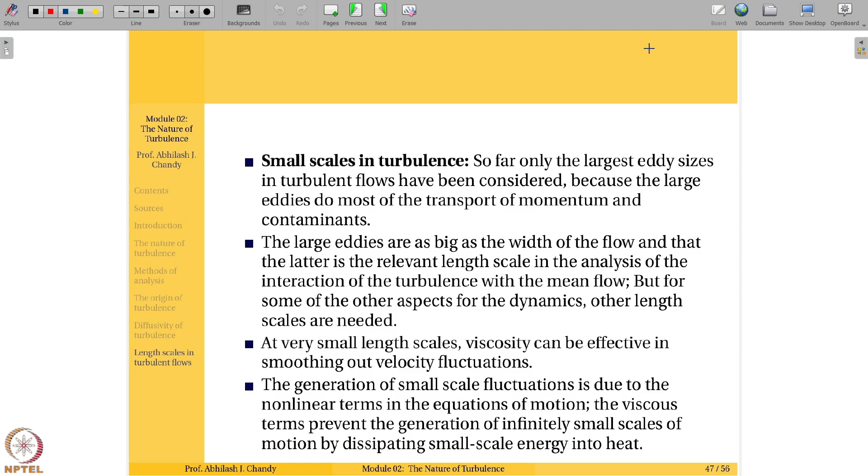And that makes sense, right? Viscous effects are more dominant at the small length scales. It is true at the large length scales the viscous effects won't be as dominant, and they can indeed be neglected because they are negligible. But on the other hand, you cannot do away with viscosity, and that's actually what we are going to continue here, especially since we are going to talk about the small scales of turbulence. Viscosity has a role to play. Dissipation at the small scales happens because of viscosity. That's the main topic for today's class.

So far we've been talking a lot about large length scales, isn't it? Because they are indeed the most important. They are what supplies the energy to the turbulent flow. That is where the energy is pumped in. So they are responsible for transport of momentum, transport of impurities, contaminants, any kind of species. They are mostly responsible for that. However, there is another effect that is also in play, and that is the viscous effects.

Now, if you think about the large eddies, large scales, they are as big as the width of the flow. So if you talk about a pipe flow, they are as big as the diameter of the pipe, order of magnitude. If you talk about flow over a cylinder, they are as big as the diameter of the cylinder. Flow between two plates, as big as the distance between the two plates. Boundary layer, that large length scale would be of the same order as the boundary layer thickness.

However, at very small length scales, viscosity starts to play a role, right? And the smallest length scale is the length scale at which viscosity is active, the length scale at which dissipation is active. And here, viscosity plays a huge role. So keep in mind, the smallest length scale doesn't mean micro scale where continuum is not valid. Continuum is still valid. We are not going down to the point where molecular scale becomes important. Molecular diffusion is important. That happens because of viscosity.

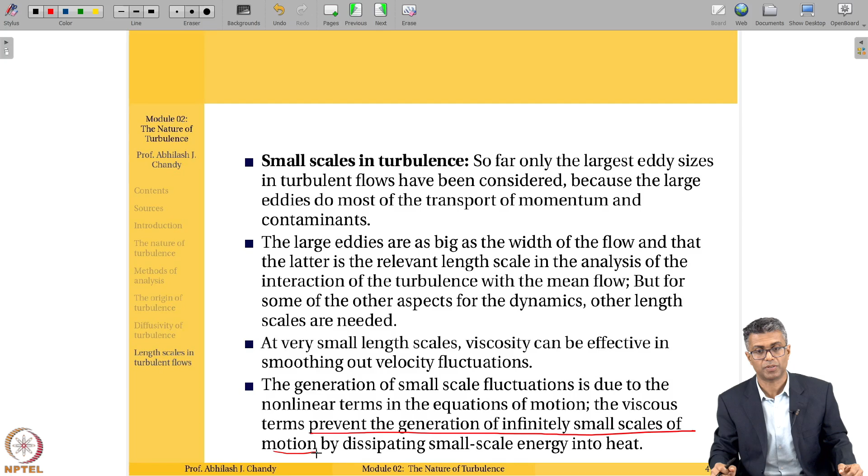So this happens, obviously, like I was saying earlier, because of viscosity. This happens because of kinematic viscosity. What happens here is, at large Reynolds numbers, it is expected that the magnitude of nu, kinematic viscosity, is so small that the viscous effects tend to be really small, negligible. But there's another effect that happens here.

The nonlinear terms in the Navier-Stokes equations counteract this threat by generating motions that are small enough to be affected by viscosity. So we would think, okay, at the large scales, at high Reynolds numbers, viscous effects can be negligible, right? So can they be neglected? No. So immediately what happens is the nonlinear terms generate small scales that are small enough for viscosity to play a role.

So in a way, you cannot just do away with viscosity, because viscosity has a role to play in dissipation. And dissipation is one of the main attributes of turbulence, as discussed earlier. That role is played by viscosity alone. So you would think, okay, at high Reynolds numbers, inertia over viscous effects can be neglected because they are negligible. Not so fast. What happens here is the nonlinear term is active always.

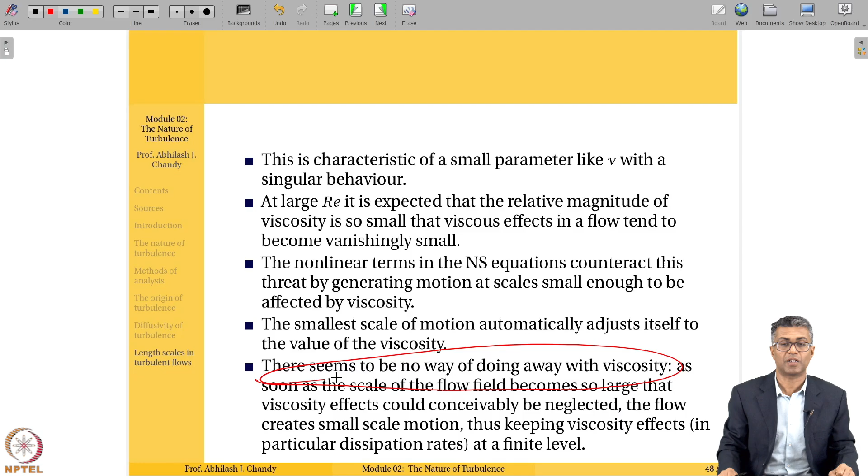As soon as the scale of the flow field becomes so large that viscosity effects could be neglected, right? The flow creates small scale motion, thus keeping viscosity effects at a finite level. And this is in terms of dissipation. It is in terms of dissipation rates. So that is where viscosity comes into play.

So if you have a flow that has only a lot of large scales, then viscosity might not play a role there. It might not play a dominant role there. It might not play a finite role there. So then what happens is the large scales are immediately broken down into small scales. Then viscosity has a role to play. And this keeps happening. That's the role of viscosity.

Now, we know that large length scales are associated with large time scales. They take longer time to move from one point to another because these are large scale motions. On the other hand, small length scales are associated with small time scales. Because they are small in size, they take shorter time to move from one point to the other. So small scale motions tend to have small time scales, and this is really important. This is the basis of one of the most important universal theories of turbulence.

If the small length scales have small time scales, meaning what? What does small time scale mean? Meaning they tend to move very fast, that's one thing, and also they tend to exist for a very short period of time. That time scale determines the amount of time that they actually exist. They have a small time scale.

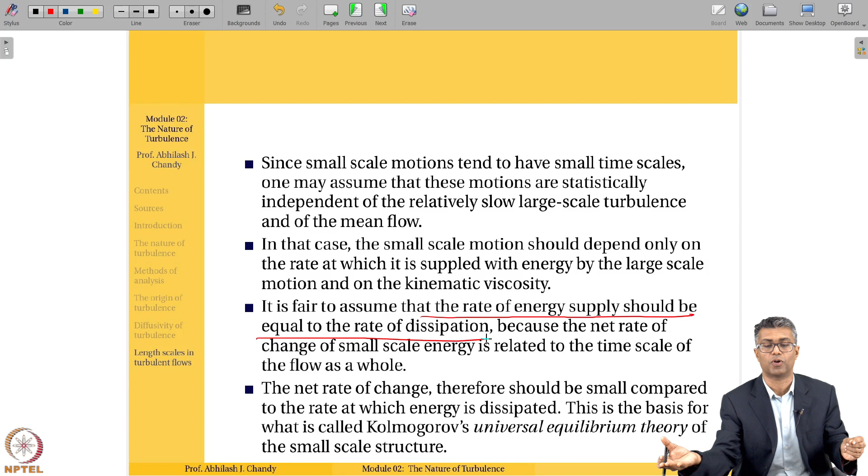So in that sense, the rate at which energy is supplied, the energy is supplied from the large scales to the small scales, should be equal to the rate at which energy is dissipated, because they don't stay for a while. And that's what I mean by, because the net rate of change of small scale energy is related to the time scale of the flow as a whole. So this net rate of change should be small compared to the rate at which energy is dissipated. This is the basis for Kolmogorov's universal equilibrium theory for small scale structure.

What you have is the small length scales have very small time scales. So they only stick around for a very short period of time. They immediately dissipate to heat through viscosity. If that is the case, then one can assume that the rate of energy transfer from the large scales to the small scales is the same as the rate of dissipation, because everything happens almost instantaneously. That's our argument, and that is the basis for Kolmogorov's theory.

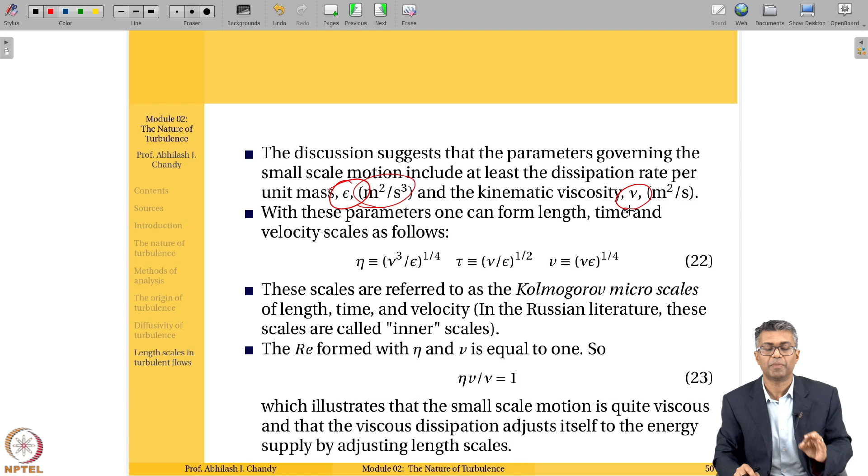Using these two parameters alone, you can come up with a set of length, time, and velocity scales at the small length scales. So you have eta, which is a small length scale, the smallest length scale possible, in fact, identified in turbulent flow, a time scale, the smallest time scale, and the smallest velocity scale.

These equations are determined purely based on dimensions. So if you think about it, just as a simple exercise, nu has units of meter squared per second and epsilon has units of meter squared per second cube. So if I take nu cube over epsilon to the 1/4, what I get is meter to the 6 divided by second cube, isn't it? Divided by meter squared per second cube. This whole thing to the 1/4.

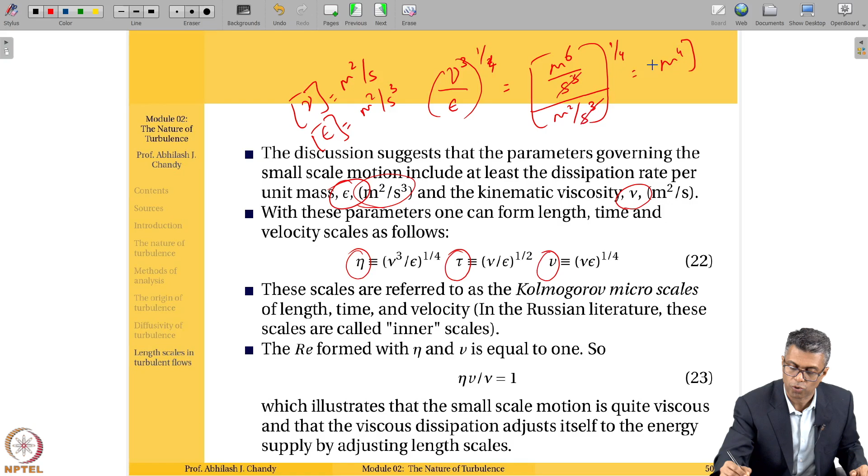And then the second cube and second cube get cancelled. And what I have is meter to the 4th to the 1/4, which is meter, which is what this is. This has units of meter. It is a length scale. It is a small length scale.

These scales are referred to as the Kolmogorov microscales, which in his paper in the 1940s, he called the inner scales at that time. The paper was originally written in Russian, translated later. So the Russian translation came out to be called inner scale. So that is what he called it in his paper, at least based on the translation at the time. So we now call it the Kolmogorov length scale, the Kolmogorov time scale, and the Kolmogorov velocity scale.

The Kolmogorov length scale is probably one of the most important developments in turbulence. Mainly because even to this date, this is used as a criteria for determining whether your experiment or model is well resolved, can be accurate enough or not. Purely based on this definition. The Kolmogorov length scale is defined as nu cube over epsilon to the 1/4.

If you have a way to calculate the dissipation rate, which is not easy to do in a turbulent flow, then you can estimate the Kolmogorov length scale like this. Obviously, there are different ways to do this, and we'll discuss those as well in the next few classes. But if you have a way to calculate the dissipation rate, this is one way to calculate the Kolmogorov length scale. Now, viscosity is of course known because it is a property of the fluid. So, like I said, this is the Kolmogorov length scale. This is the Kolmogorov time scale.

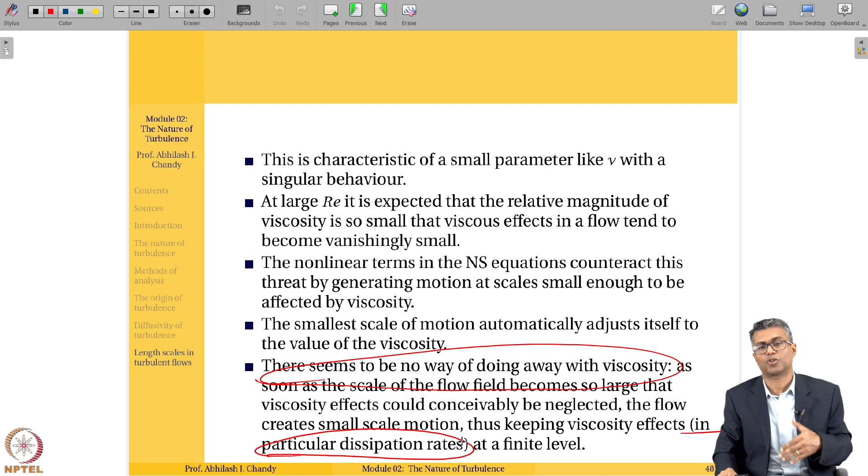It's very interesting, right? So if you think about these length scales, this is going to be provided as an exercise for you. We are going to use Buckingham Pi theorem to come up with these equations. It is the basis of the theory that was seminal here, I should say. The fact that he used the idea that small length scales have very small time scales, and hence the dissipation rate would be equal to the rate at which energy is transferred. That was a significant momentum shift.

And today, if you are actually doing a turbulence simulation and you want to figure out the grid that you need to use in order to resolve the smallest length scale, you make sure your smallest grid size, or your average grid size, is as small as the Kolmogorov length scale. And this is the basis for that. Later we will see how to relate this Kolmogorov length scale to the Reynolds number.

And so before running a turbulent simulation, you typically don't have the value of dissipation rate, but you have the value of Reynolds number typically. So then you could use that to estimate what the Kolmogorov length scale is and try to make sure your grid size is of the same order as the Kolmogorov length scale.

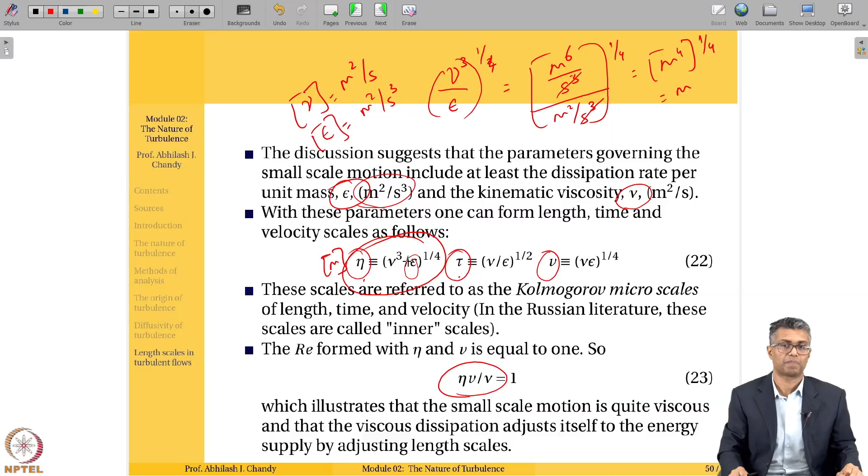So direct numerical simulation is one turbulence simulation approach where even the smallest length scale is resolved, right? And one of the requirements for those kinds of simulations is that the grid size should be as small as the Kolmogorov length scale. And that is the first, I would say, sanity check that you need to do for your simulations. Only then will you know that your simulation actually is going to be accurate. That is how important this is. Even to this day, these are parameters that are used to test simulations and experiments.